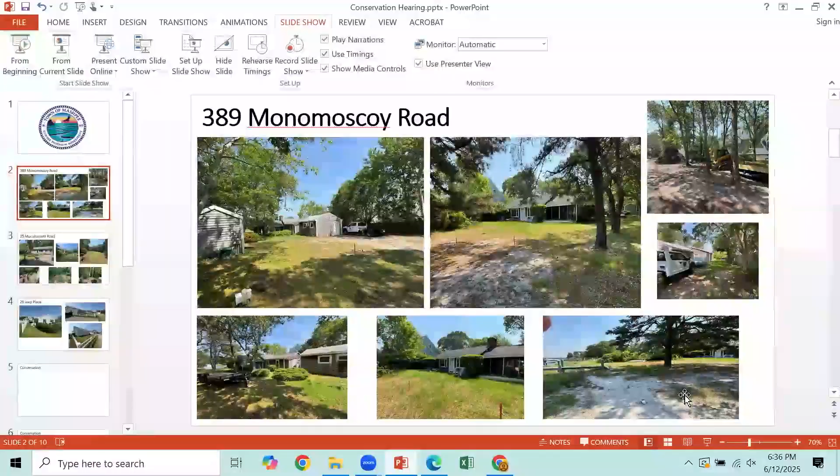We do show a table on the property, on the plan, and we are required to have 3,670 square feet of mitigation, and the mitigation area accounts for 3,685 square feet.

So we're meeting the requirements on that. That mitigation is, for the most part, within kind of grassy area.

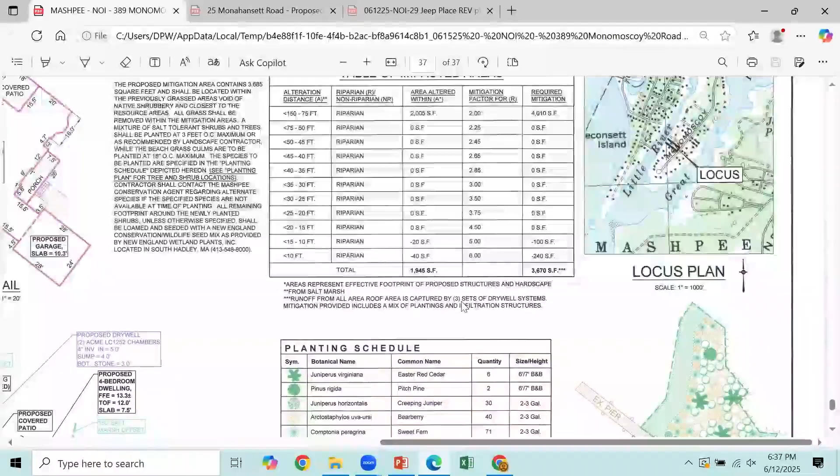Our erosion control line, a limit of work, is situated between - actually we have two erosion control lines. The first would be along the salt marsh, so we could protect the salt marsh when the mitigation is being proposed. The second line would be to protect the rest of the land within the 75-foot buffer.

To account for surface water runoff from the roof, we are proposing dry wells around the property, and we have connected those roof dry wells to the anticipated gutter locations so that the surface water runoff can infiltrate. I believe it was a 10-year storm that we had calculated it for, so that would help with surface water runoff.

Currently, there are no stormwater controls for runoff from the existing structures. The site is relatively level and will remain relatively level. There'll be some minor grade changes in the front and the back, but this house is within the AE flood zone.

So the structure itself will be constructed on a crawl space, and the slab of that crawl space won't be below lowest grade, so that the flood waters will be able to move freely through the flood vents that will be provided around the perimeter of the structure, just to meet building code requirements.

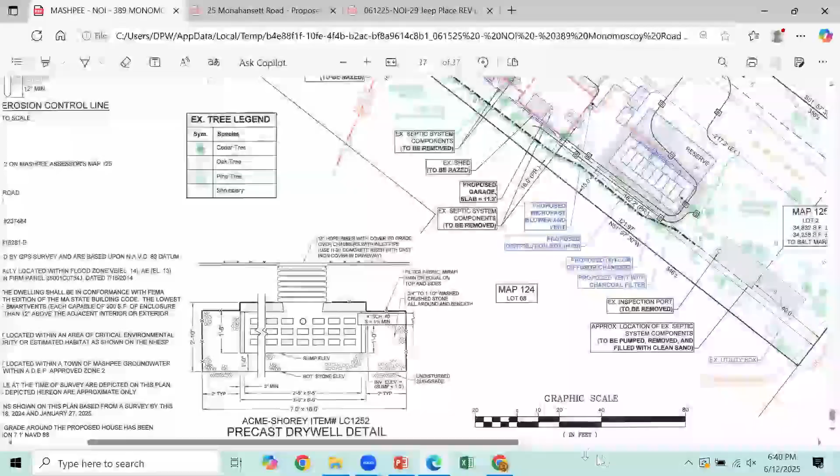We have native vegetation outside 75 and up to the 150. This is beyond it, so beyond the 150. But we did do a native vegetation calculation between existing and proposed.

So to be in conformance with the regulations regarding work within land subject to coastal storm flowage, there should be about 30% minimum of natural vegetative area. Currently, as it is, there was 28.5%. So we are proposing to increase that to 33%, and the majority of that is addressed with the mitigation area closest to the salt marsh. So we're in conformance with that.

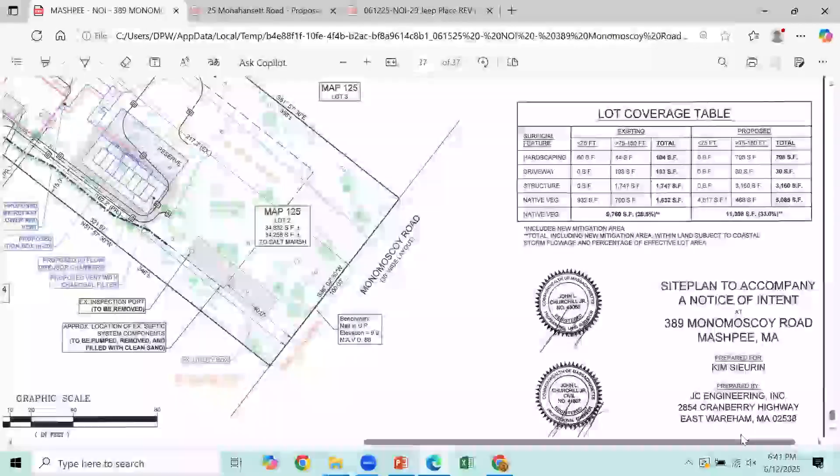Unfortunately, we will need to address the areas that were altered up closer to the street, and we're fully aware of that. We also received some comments from staff. There are some recommendations to modify a few of the plant species that this area would be more appropriately sited with, and we have no issue with swapping out a variety of species.

We did propose 8 new trees between a couple different species and a variety of shrubs and grasses over that 3,685 square foot area. So pending any other requests by this commission, we anticipate to address the mitigation in the front of the property and any other comments that you may have tonight.

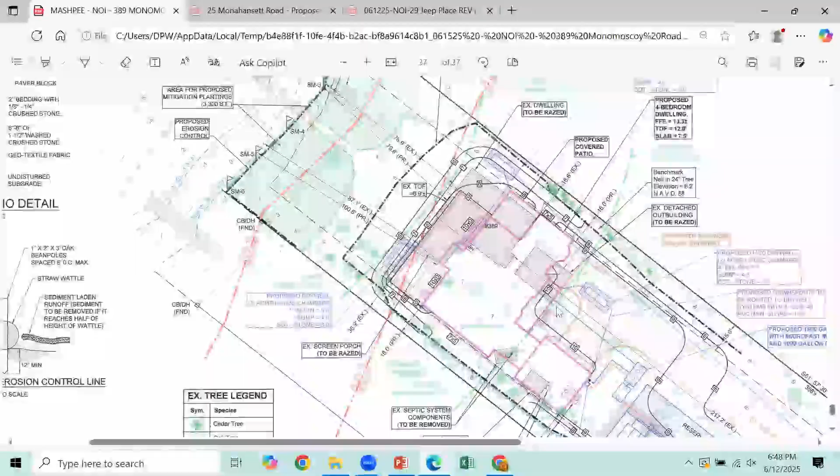I believe it's like 7 foot by 13 foot. That will obviously be impervious, but the rest of the area will be pervious. And no fence around the plunge pool?

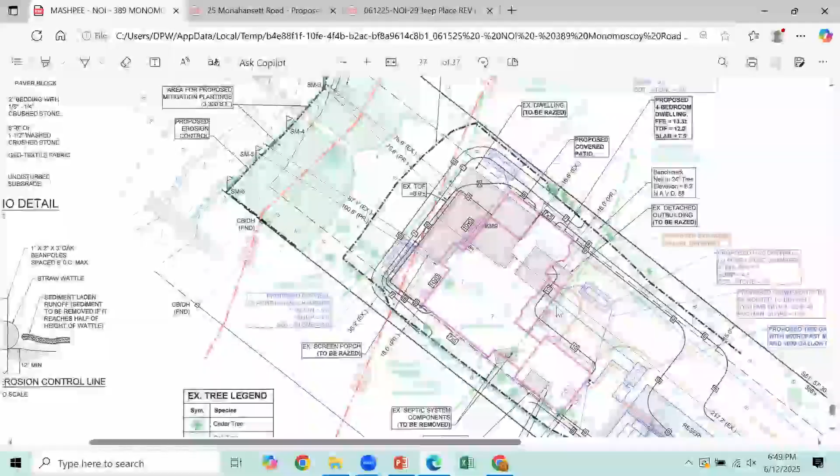I don't know the exact code on that. There may have to be some type of requirement under the building code. According to the client, it sticks up about 18 inches and then is about 4 feet deep, so it's about 5 feet tall. It might need a cover, and it might be nice to know if it needs a fence.

Okay, Marjorie, do you have any questions? No, I'm good. That was where I was going, and I'm fine. Okay, so I have a few questions.

Starting off with the number of trees cut, you say at least a dozen, right? Yeah, at least a dozen around the footprint of the house. So can you add a bunch of evergreens on the south and north property lines for buffer and for replacement of those trees? We can do that.

We were just recently requested to stake out a boundary line to the south, and come to find out the neighbor's yard is up really close to the wood line. So we will definitely add a number of trees along the southern boundary, they want to add some buffering anyways. Something at least evergreen, 6 foot, something like that. Yeah, we have no problem with that.

I actually spoke to the property owner today because we had just requested the stakeout. They had requested us to stake that boundary line out, just so that everyone knows where that line is before anyone does any work on either side. All right, thank you.

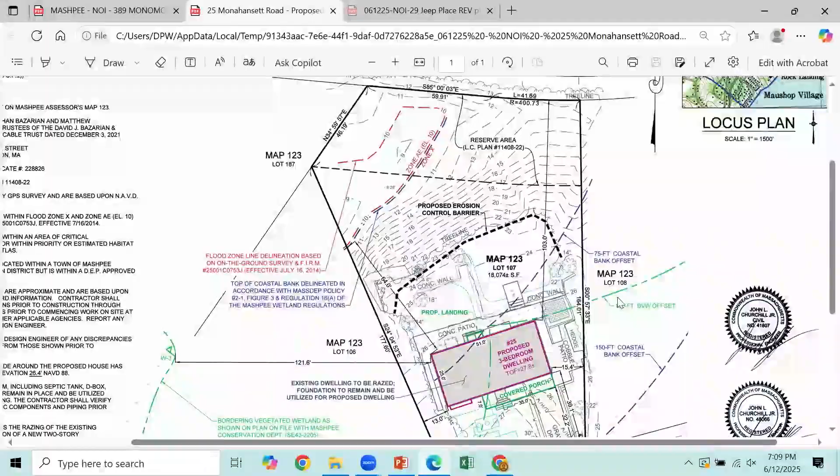So again, we're looking to build the proposed house on the existing foundation. The new house will include a new covered porch off the front, which would be the only real land disturbance anticipated, with sonotube footings to support that porch. Otherwise, the intention is to leave the site as undisturbed as possible, including all the patios on the rear and sides, the lawn area out back, and the septic in front. The utilities will be disconnected - the overhead wire during construction - but they intend to use the existing septic system, which was installed in 2017.

All utilities would be restored to essentially the original condition upon completion. As a precaution, we proposed an erosion control barrier running along the rear of the yard, right where the lawn area ends at the top of the slope. We don't anticipate any real earth disturbance or alteration, but just as a precaution, any debris that might make its way in that direction would be stopped by the fence there. That's essentially the project, and I'd be happy to answer any questions.

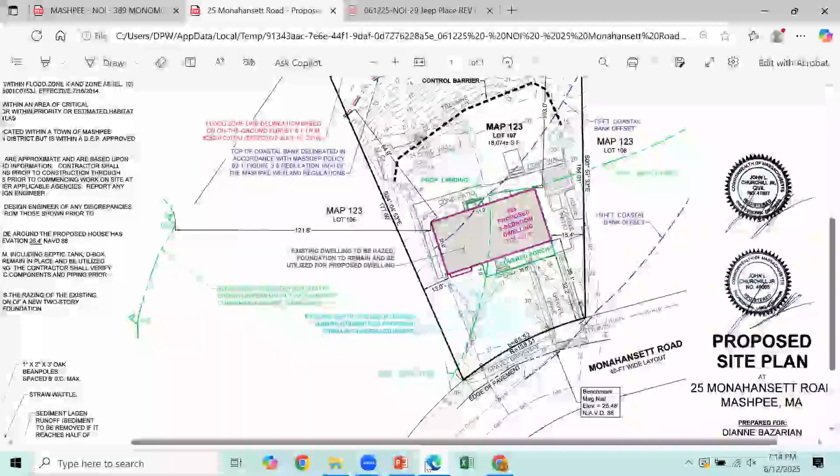If the commission requires mitigation, this is just to rationalize my comments, and I could easily be wrong. If the front porch is going over a lawn or landscape area, then mitigation should be part of this. If there was structure there already, it's kind of like existing structure being replaced by another footprint, which is not something that typically triggers mitigation. But if that's not the case, and I don't know for sure, mitigation certainly should be required at a 2-to-1 ratio.

Looks like part of it's going over a gravel driveway, part of it's over a few foundation plantings, and part of it's over a masonry step, according to the photograph. Okay, so I think it makes sense to require mitigation for that. I just thought from the plan it looked like it was going over an entire area of existing structure or hardscaping, but it wasn't quite clear.

So I agree that mitigation should be something that can be conditioned. And also, I think it would be a good idea, if heavy machinery is to be used, that if the commission were to issue an order of conditions with this, the applicant provide a very detailed methodology when it comes to demolition work, with the understanding that if a foundation needs to be replaced because the existing foundation isn't adequate, that would require an amended order to come back to the commission for that kind of work.

Sounds good, Drew. There's also a new back stoop too. I don't know what that's over. Does it look like concrete right now, looking at the photograph? Yeah, it's concrete. It's a raised porch right there.

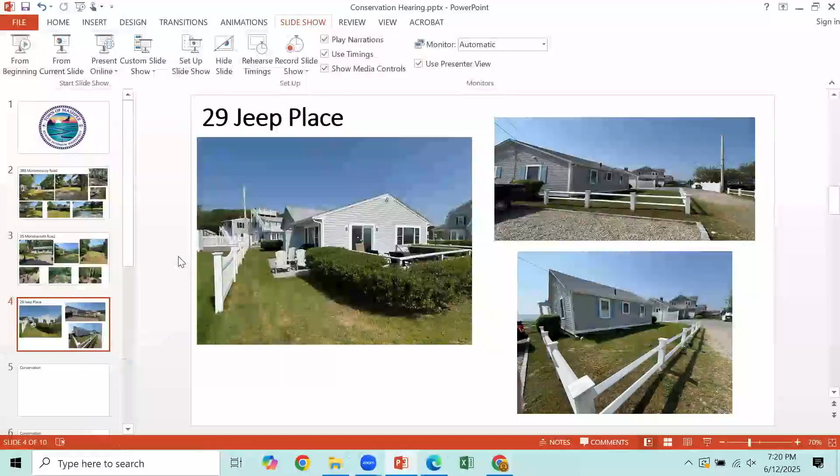Good evening. My name is Jessica Smith. I am a wetland scientist with Goddard Consulting, and I'm here to present the notice of intent for 29 Jeep Place. So this project is fairly straightforward. Resource areas on this site include coastal beach, coastal bank, which was delineated by Goddard. A coastal bank analysis was provided as part of the notice of intent and was delineated in accordance with Mashpee's Conservation Commission definition and requirements.

The project includes the replacement of a failing foundation. No increase to the footprint is currently proposed. The applicant is additionally proposing the upgrading of a cesspool system on site to an IA septic system. This Title V system was approved by the Board of Health and will be an improvement to existing conditions on site. Just to reiterate, there is no expansion of the existing footprint or increase to impervious surface proposed.

All access will occur on site over existing lawn and existing driveway. The site will be repaired to similar to existing conditions post-construction, as well as there will be no loss of native vegetation as part of this project. It's fairly straightforward. Do you have any questions? Thank you.

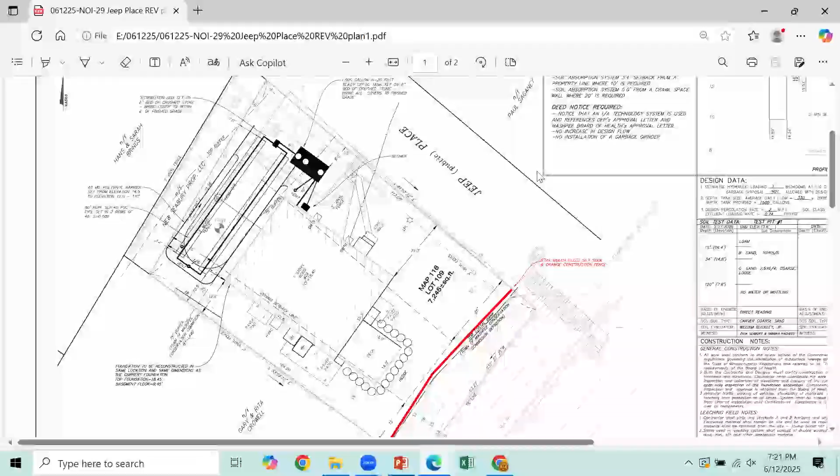Okay, commissioners, any questions? Not here, I'm good, it's a good project. Yeah. Nothing, Sandy? Okay, Rich? Straightforward. Okay, Marjorie? Pretty straightforward is right. No, I'm good, thank you.

Okay, couple of questions I have. I'm not seeing any erosion control on the plan. So on the sewage disposal system plan, highlighted in red, an 8-inch diameter mulch-filled silt sock is proposed, as well as an orange construction fence near the top of coastal bank. Okay, what about along the street and then the property lines? There is none proposed at this time.

It's really flat there. It is a fairly flat site, yes. Right, but there's no dimensions given, you're about 12 and a half feet off the rear property line, so, and then I assume, since we don't have a construction methodology, you're going to lift the house up on cribbing and then dig underneath and put a new foundation underneath, is that correct?

That's my understanding, correct. So when you dig, there's usually soil moving, you'll have to go 4 feet outside, so during heavy rainstorms, if you have a pile of sand along that south property line, it might move into the neighboring property. Yeah, certainly I would add additional erosion control around the whole property. We can certainly add that.